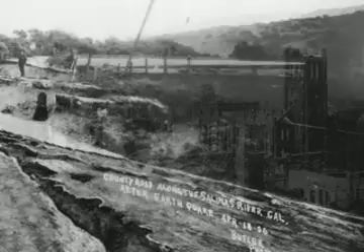April 18, 1906, one of the worst natural disasters in U.S. history. About 300 miles of the San Andreas Fault moves as much as 28 feet. The Salinas River changes course, permanently, by 6 miles. Unreinforced brick buildings crumble like so much sand. San Francisco and nearby cities are laid waste, and ensuing fires ravage thousands of wood frame buildings. Over 3,000 people lose their lives.

Back then, our understanding of earthquakes was meager. While predicting earthquakes remains unattainable, our ability to prepare for and mitigate quake damage has advanced greatly over the last century, and promises to improve into the future. That's because here, 100 years later, students from across the country have come to the PEER Undergraduate Seismic Design Competition to test their ingenuity at designing seismically robust buildings.

With support from the National Science Foundation, the competition was conducted by PEER, the Pacific Earthquake Engineering Research Center, along with EERI, the Earthquake Engineering Research Institute. The PEER Center is a collection of universities and industry partners working together to develop what we call performance-based engineering. And performance-based engineering is all about how to design structures, taking into consideration the real ground motions that are expected, real behavior of the structure, and ultimately how it performs. So we can build structures that'll perform the way society and owners want them to.

I think it's a great opportunity for these students to be able to participate in this 100th anniversary conference, not only for the competition and for the design aspects, but also to be around a lot of the acting professionals and practitioners to see what it is really like on the outside world and get a view of what it might be like once they graduate and go to look for a job in industry.

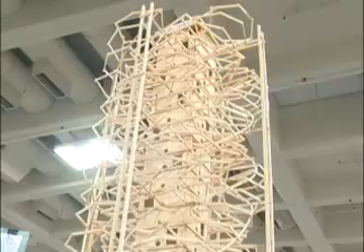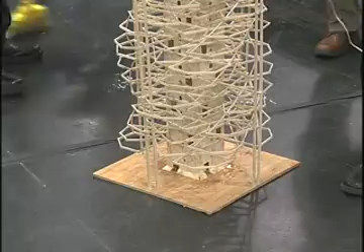To address the goals of performance-based engineering, PEER challenged teams to design a multi-level office building that would not only survive some of the worst earthquakes recorded, but also achieve architectural and economic excellence. The buildings were constructed of balsa wood and glue. Built to 1/72nd scale, the buildings are limited to a height of 2 meters and a footprint of 18 inches. This makes each story scaled to about 12 feet high, with about 38 floors total height.

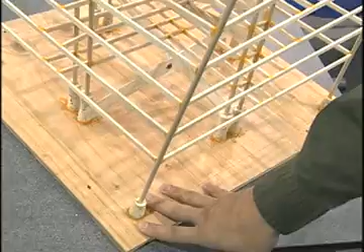Mechanical dampers were allowed, and at least one team used them as a structural element at the base of their building. This is our foundation system, and it's a damping system. There's a cork casing that encompasses the columns, the shell columns and the core columns. And essentially the columns aren't actually attached to the base plate, just the cork system is. So the column sits within the base plate and is allowed to sort of rock back and forth as the structure moves, causing friction between the cork and the column, and it dissipates some of the energy.

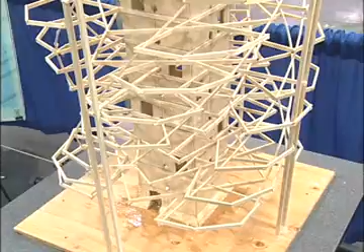Some used internal shear walls in the core of the building. I feel that ours is going to be a winning design because we've simplified it and not made it too complex. We basically have a shear wall core in the middle that carries the load. The exterior, all this design on the outside, the spiraling effect and things like that, is not structural at all. All the structural load, the weights and everything are carried down through the shear wall. So we could get really intricate with the aesthetics because they're not really carrying the load. Designs varied, from straightforward and robust to graceful.

Students worked diligently on their entries and took a variety of approaches to address the many considerations of performance-based design. We realized that to increase the floor space, you have to make the building square, and we figured everybody else is going to do that, and architecturally it's not different. So we decided to go with the octagon. Although that would sacrifice some of our floor space, we figured we could win on the architectural part. Our performance is based upon minimizing roof acceleration and drift ratio of the entire structure.

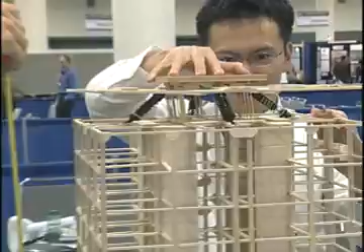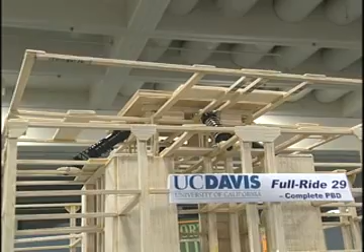We're basically trying to put a soft story to roof isolate the roof acceleration. So what we have is pin-pin connections on the top, so that makes the roof very flexible laterally, horizontally. And then we place these dampers to damp out energy. Now the problem with that is we need some sort of returning force so that after the motion, the soft story will have to return to its center equilibrium point.

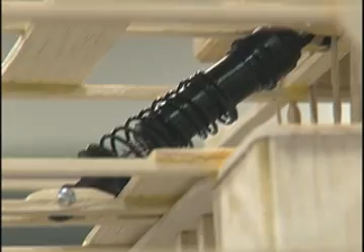Now with just the damper, that's not enough returning force. So what we had to do was put springs in an angle on the dampers so that it will provide some returning force. Now the problem is that we have to find a balance. The stiffer that we make the springs, the stiffer the soft story will be, so it will be less effective on damping out energy. But we want the springs to be stiff enough so that it can return to equilibrium.

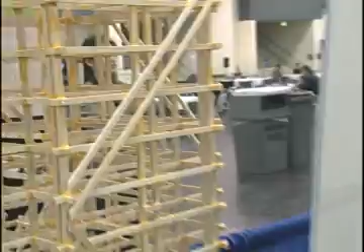These are braces, and they are pretty much just for show. They don't add too much structural significance. The one that I think has the most structural performance is the columns that go up and down. They pretty much are the strongest element. These are pretty thin. We worked with architecture, and they just told us, if we stick on a nice diagonal, it gives it some character, and it's pleasing to the eye, and I think that's important too.

Instead of just a rigid cross brace, which makes the building stiffer, where it connected, we decided to put a piece of sandpaper in there and allow the joint to move and actually be open, and the sandpaper will create a friction that'll take energy out of the building itself, so it won't move as much in both directions. It might slide in one direction, but as it tries to move back from the earthquake displacement, it'll actually end up losing energy and slow itself down just by the friction within the joints.

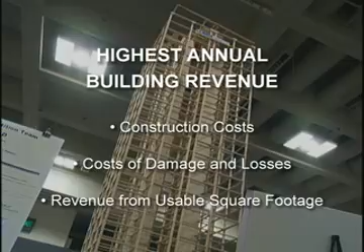The winner will not just survive the quakes. The team with the highest annual building revenue wins the competition. This revenue is derived from a combination of construction costs, costs of damage and losses, and revenue from usable square footage. A huge component of the challenge is the technical presentation, where the students must clearly articulate their design rationale and show how they arrived at it.

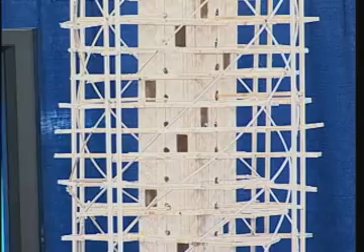So what we did is we devised a constant floor plan that rotates around the shear core in 15-degree increments, which provides a complex structure that's still very elegant. For the income, we used a floor plan that maximizes the maximum allowable space, resulting in a floor plan where each level has approximately 0.115 meters squared, and the total is 2.94 meters squared. As you can see, we've punched door holes in the shear core, allowing the interior core to be counted as usable space. This results in a plan that brings in a little over $1.84 million per year.

Another feature which enhances the aesthetics of the building are the diagonal members, which draw the appearance together and attract your eye upward along the height of the building. Of course, the most interesting feature of the structure is not the appearance, but the structure itself. Our building utilizes an innovative decoupled system in which the inner core is designed to be more flexible than the outer floor system, and both are independent, joined only by dampers, which allow them to play against each other and cancel out each other's movements, reducing damages in the structure.

Our major focus was on the construction method itself, because in our past modeling we know that failure happens in a joint, and there's a lot of joints in the system, and in order to have the redundancy in the building, we had to ensure that we made a quality joint. So we notched each beam and created half-lap joints and cross-lap joints, which are less of a mess to create, and they're more aesthetically pleasing than a butt-end joint with a gusset plate.

We are focusing on costs, right? As everybody here is focusing on costs because money moves the world. But I tend to disagree. I think innovation moves the world. So what we're really trying with our structural elements is we're trying new concepts. We've seen shear walls, we've seen cross bracing, right? So we're going to try something different, something more innovative. We wanted to focus on architecture, focus on space. Our design is based off of two things. It's based off of a core, which supports all our gravity loads and lateral loads, and it's based off a non-structural shell.

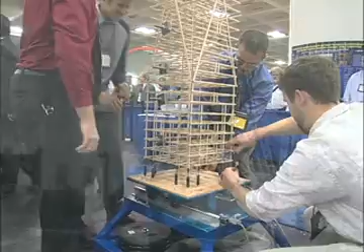In the final analysis, everyone is here to see the buildings perform in quake testing. To do this, the models are placed on a shake table which will replicate the ground motions of 3 devastating quakes: the 1940 El Centro, the 1994 Northridge, and the 1995 Kobe earthquakes.

Metal rods are added to simulate building loads. At the top and bottom of the models, sensors are placed to reveal 2 important parameters in calculating damage: roof drift, or how far the building sways, and roof acceleration, or how fast it sways. A combination of these measurements helps the judges determine how well the building performs.

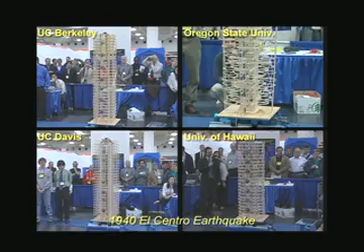You can imagine if a building drifts too far too fast, that things inside are not going to fare well in an earthquake. With that, the testing begins. This structure we're going to shake first with the 1940 El Centro earthquake. Okay.

The next earthquake is the 1994 Northridge earthquake. Okay. Our next earthquake is going to be the 1995 Kobe earthquake. Kobe earthquake. Go.

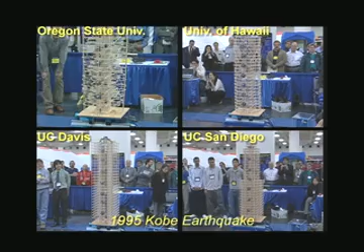After being subjected to the required quakes and recording the performance data, the organizers put on a show. The models were taken to extremes, both rapid violent shaking and something called a sine sweep. A sine sweep finds the building's natural sway frequency and then repeatedly subjects the structure to that frequency. It's much like an opera singer's voice breaking a wine glass, and sometimes the results are unmistakably similar.

Okay, the team said they don't have a box to ship it back to Washington. So we're going to go ahead and just shake it at its natural frequency and see what happens. However, in some cases, student ingenuity and design trumped the best efforts of the shake table and survived the demolition derby unscathed. Okay, are we ready? Okay, here we go. Stand back.

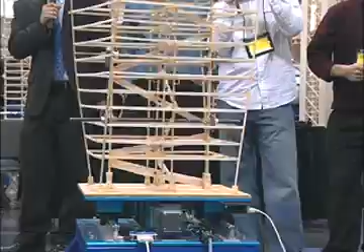Down. Yeah, look at the dampers move. All right, I think somebody's beaten the shake table. Eddie? We're taking it home. I think we've been beaten.

Well, I guess the grand champion, the first place team of the 3rd annual PEER Seismic Competition with an annual rental income of $2.25 million a year is another PEER school, University of Washington. You did a great job. Good job. Thank you. Congratulations.

Good job. Thank you. While the University of Washington was awarded first place, in the end, every team was a winner. Students had an invaluable experience, putting theory to the test and making their ideas reality.

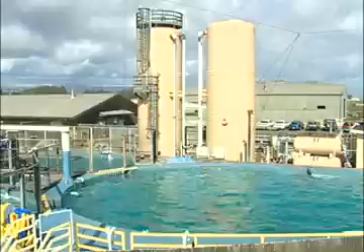UC Santa Cruz is one of the top centers for marine mammal research in the world. The campus has a unique combination of field sites and laboratory facilities for marine mammal research, including animal holding pools at Long Marine Laboratory, and ready access to natural populations of marine mammals in Monterey Bay and at the university's Año Nuevo Island Reserve.

Well, the Marine Lab is the university's sort of coastal outpost for marine research and the kinds of things that we can't easily do on campus where we need running seawater. So the study of nearshore organisms, the study of marine mammals where we need large amounts of tank space and pool space, a good supply of running seawater. And then we have a whole public education program that tries to take the research the scientist does and bring that to the public, grade school kids, their families, so that we all get a better understanding of how the marine environment here that's so important to us works.

Biologist Terry Williams is working here to answer a fundamental question about marine mammals. What does it take for a mammal to make a living in the ocean? We're interested in basically what makes a dolphin, and then what a dolphin would need to survive. Our research program tries to do two different things. We've got the up-close physiology, biology of these animals that we do in a controlled setting like this, and then we want to know how does that really work out in the wild? What does a wild dolphin need in order to make it?

So we work all over the world on animals from the Antarctic to the Arctic, and for the dolphins, the wild work is done in the Bahamas. We've been looking at whether temperature per se is a big factor in these animals' lives. How much do they need to eat during different seasons, and then how much of a metabolism change can we expect? And again, because of the idea of global climate change and water temperature changes that we're certainly seeing off our coast.

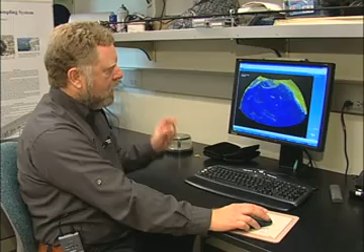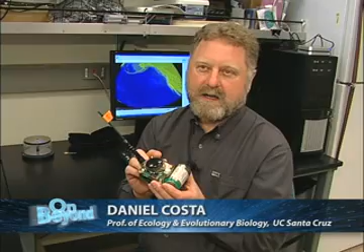When the trail gets very small, it means the animal's not moving. Biologist Daniel Costa is using the latest in satellite tracking technologies to study the amazing annual migrations of elephant seals and other marine animals. This is our latest and greatest technology. This is our GPS tag. This measures where the animals are to within 5 to 10 feet. This also gives us information on what the animals are doing in terms of where they're diving, how long they're diving, how deep, and their general diving pattern.

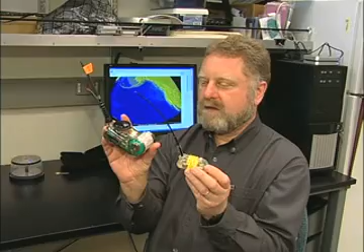You couldn't put this on a sea otter or some sea lions, so we use a tag like this, which is much smaller, but it gives us a much more limited amount of information. It tells us just where the animal is. The tags are harmlessly attached to the fur on an animal's head or back and fall off when the animals molt in the spring. So elephant seals have been a long-term animal that we've studied here.

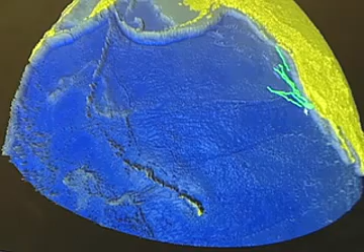And in the last 10 or 15 years, we've been able to take that research much further. Instead of just seeing what the animals do on the beach, which is pretty much what we're limited to, the sort of computer generation has taken over, and we've been able to put radio tags first and satellite tags and time depth recorders. So now we've got an unprecedented view of what these animals are doing when they're at sea, hundreds, thousands of miles away from Año Nuevo Beach.

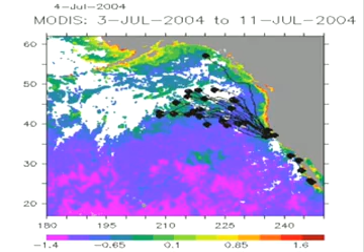Research on elephant seals and other species has enabled Costa's group to identify hotspots in the open ocean where marine mammals from elephant seals to albatrosses go to feed. We've got this program called Tagging Pacific Pelagics. We're tagging 23 different species of marine mammals, birds, sharks, fish, one species of squid, whales. So one of the things we're trying to do is take this away from the point of view of just what do elephant seals do to what do marine vertebrates do and where are the important areas in the ocean where the marine vertebrates are going to feed.

These tracking technologies and tracking large numbers of animals are certainly leading the way to figuring out how to better conserve the ocean in areas that we can't get to otherwise. We are in an incredible position being on the edge of the nation's largest national marine sanctuary, but not only is it incredibly productive biologically, probably the greatest diversity of marine mammals anywhere in the world, so that provides sort of the perfect environment for the scientists, whether it's the elephant seals at Año Nuevo, the sea otters. We don't have to go thousands of miles necessarily to study these animals. We've got them right here in our backyard.

Reporting from Long Marine Laboratory in Santa Cruz, this is Romney Dunbar.

Seven years ago, Joe Norbeck, former director of UCR's College of Engineering Center for Environmental Research and Technology, had a problem. The center had just completed construction and testing of a new high-temperature reactor designed by the United States EPA to convert wood chips into methanol. The reactor did not work to the level needed for commercialization, and while this was a setback, the failure inspired Professor Norbeck to think outside the box, so to speak, concerning the remarkable potential for reactors such as this to help solve the world energy crisis.

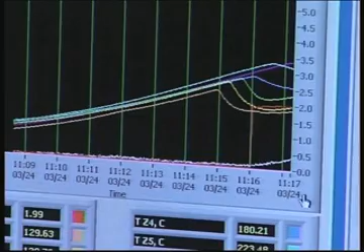We had 4 very bright undergraduates that came to me and said, we'd like to work on a project on energy for our capstone course on engineering design. And I had an idea of modifying the system that failed in what we consider to be a more versatile and unique way. Overall, the process consists of 4 steps.

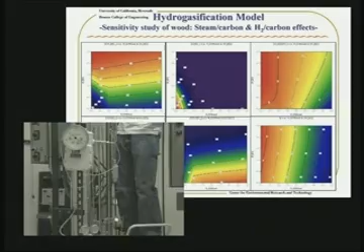The first step, as we had said, is what we call steam pyrolysis. And I use the analogy that it's like putting tough meat in a pressure cooker and heating it for a while and it gets soft. That prepares the material for when you bring in hydrogen, it converts it very quickly to methane.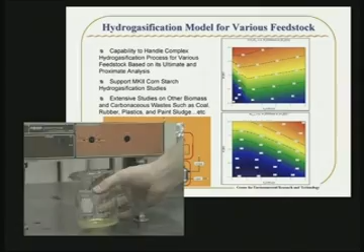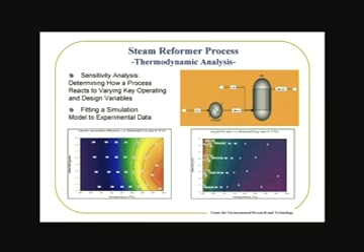And so the next step is to take the methane and do what's called steam reforming to convert that to CO and hydrogen. And then that you put into a catalyst and you make liquid fuel. So the challenge to the students was to see if this would work. We didn't have any laboratory to do that, but they had computer models that we were going to utilize, and off they went.

Well, after the 2 quarters, I remember sitting there in the audience while they made their presentation, in which they said, if you take half of the wood that goes to a landfill, we can replace a major portion of diesel fuel in LA from waste, and we can do it for 65 cents a gallon. And I then immediately said back to them, first of all, you got an A+ in the class, and secondly, put an invention disclosure on this.

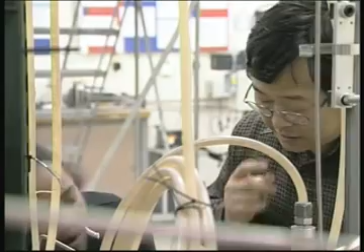Engineering undergraduates have been central to the success of the Lisp project since the beginning, helping to solve myriad technical difficulties in the effort to successfully integrate Lisp's complex series of chemical reactions. This job gave me an opportunity to apply everything I learned in class in real life. My job was to run this and see all the limitations that it has and what we can improve on for a newer reactor and a bigger reactor.

Because one of the reasons we wanted to improve this is because our future plan is hopefully to build a pilot plant. So what I was doing is giving them all the results. Based on these results, we were able to calculate the new diameter, height, and all these things that are necessary to build a new reactor.

Professor Chan Seung Park, a senior partner in the project, helped solve one of the most difficult of Lisp's potential problems, maintaining high pressure throughout the system while taking in raw material and producing fuel continuously. It looks like a very simple thing, but actually this is the hardest engineering challenge, because our reactor is very high pressure, and our feed in our world is just 1 atmosphere. So we have to overcome the pressure difference.

So we ended up making a slurry with the water, then we can pump it. There are so many kinds of technology already developed for pumping against high pressure. So we decided to use that technology so that it works.

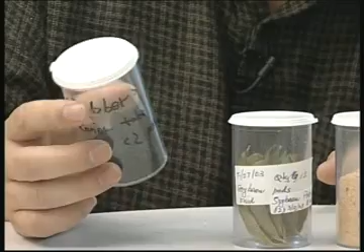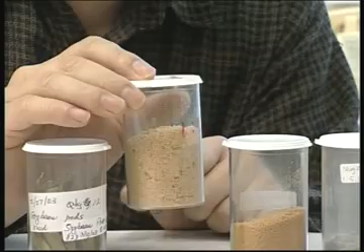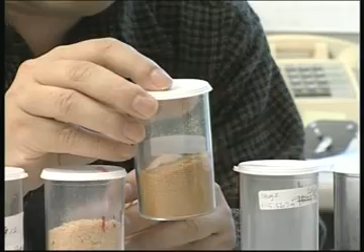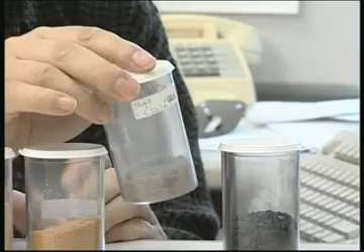This is the polyurethane foam. This is coming from the car seat. They use the polyurethane foam for the cushion of car seats. If you go to the wastewater treatment plant, there is lots of sludge deposit in the facility. We take the sludge and we convert it to valuable fuel.

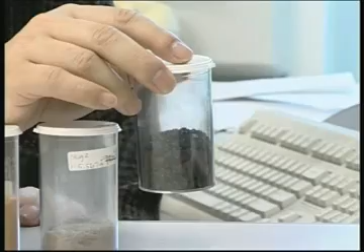This is the coal. Coal is regarded as an inferior fuel compared to oil because it is solid, but we convert this solid coal into liquid fuel. This technology can be used throughout the world. And if you have a country such as Thailand, some areas in South America that have a lot of biomass, you now have a readily available feedstock generated from removing CO2 with sunlight to make fuel. So you don't have any net impact on global climate change such as CO2 emissions.

So it's a pretty exciting, promising technology that started with a failure and 4 undergraduates doing a project to graduate. And it's been an interesting experience for us as an organization, and it demonstrates the quality of our students.